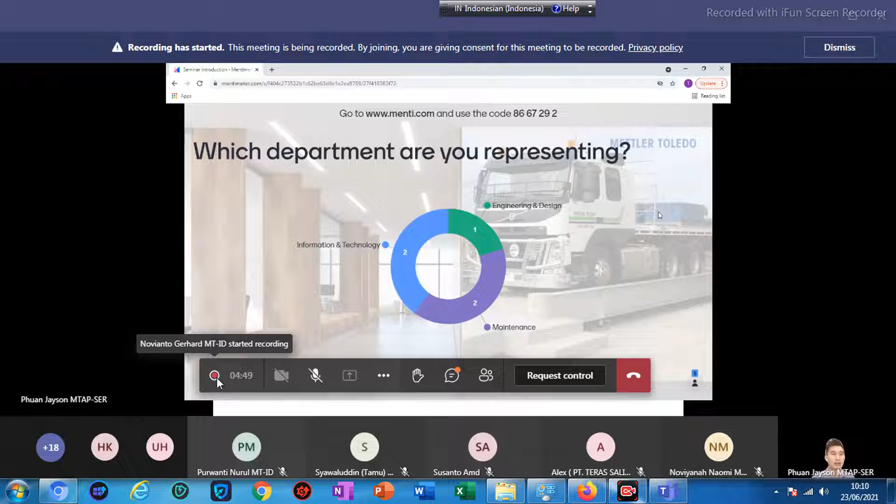And then if we look at the next question here, what are you interested to learn today? We got load cells. It seems like most of you want to know about load cells. 1 person said that they want to know more about calibration and services, and 2 people say, I don't know why I'm here. So if you don't know why you're here today, hopefully I can help to educate you on some of the trends, and hopefully that will give you an eye-opener on today's topic. Okay.

And lastly here, which of the below have you experienced in your plant? Some of you mentioned that there is fraud at the weighbridge. Some say slow maintenance service response is bad as well. Not weighing accurately. It seems like there are some load cell breakdowns that have been observed as well. Tank weighing applications: although this is a vehicle one, I would also like to see if there's any other scope outside of vehicles that may be a concern. So you can see here there's tank weighing. And some of you mentioned that you've not observed any issues so far.

So great, keep this coming. If you have not filled it up, please do so. Just go to the website, menti.com, and type in the code. It'll be great for me to understand where I should focus. So since I know now that what you want to know more about is fraud, service, load cell breakdowns and accuracy, those are the topics that I'm going to hit today. So thanks everyone for participating. Now I'm going to go into our topic here.

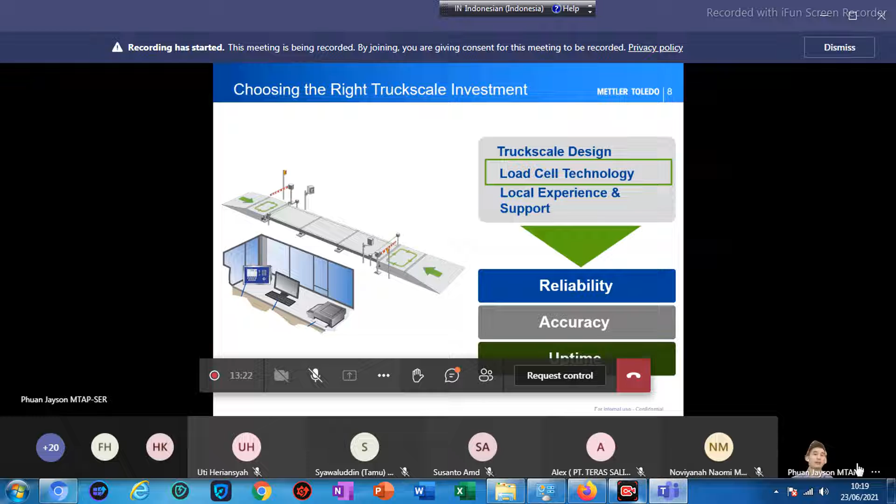So if you purchase a load cell, how much are you expecting to spend in terms of maintaining that load cell for the next 10 to 20 years, right? And last but not least, it comes down to your system performance, where if you have a load cell, you need to know how reliable is it and how much can you trust that the load cell will weigh accurately most of the time, right?

So when you look for a solution, don't always look for something that's cheap upfront and say that, oh, that's a good price for me to purchase, I'll buy that. But then realize that over the next 10 or 20 years, you are spending more on maintenance than the initial price, right? So what I always tell the participants is look for something that may be a bit more expensive, but if you see that the cost of maintaining it is cheaper, then go with it, right?

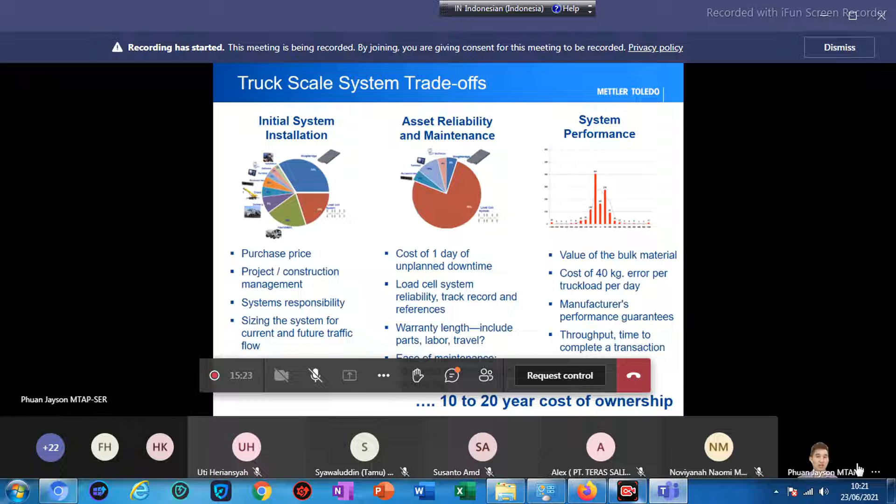Okay, so when you look at purchasing a weighbridge solution, right? We're talking about everything now, right? You can see that 34% of your budget goes to the weighbridge itself. 20% goes to the foundation works. 20% of that budget will be spent on the load cell, and the balance of it is really around installation, software, logistics, and all of that, right?

So what you will realize is over the scale lifetime, and these are actual data that we have collected, you can see that out of the 20% of the budgeting for the load cell system, 78% of the time, the issue would come from the load cell itself, right? And some of these issues are really around load cell failures, right? Where, we saw earlier, some of you commented that, hey, I have a frequent load cell breakdown, right? So when you exchange that or when you replace that, it comes with a cost.

Cables as well, right? Sometimes rodents or rats can bite the cable, or somebody can accidentally cut it, whatever the reason may be. Those are also one of the common reasons that contribute to that 78% of cost. And last but not least, your junction box, right? Junction box, if you put it under the scale, if it rains, water gets in, it would fail very easily, right? So that's what makes up the 78%. That's why I say, if possible, don't try to save up on the 20% to find out that you are spending 78% of your maintenance budget just to fix these issues.

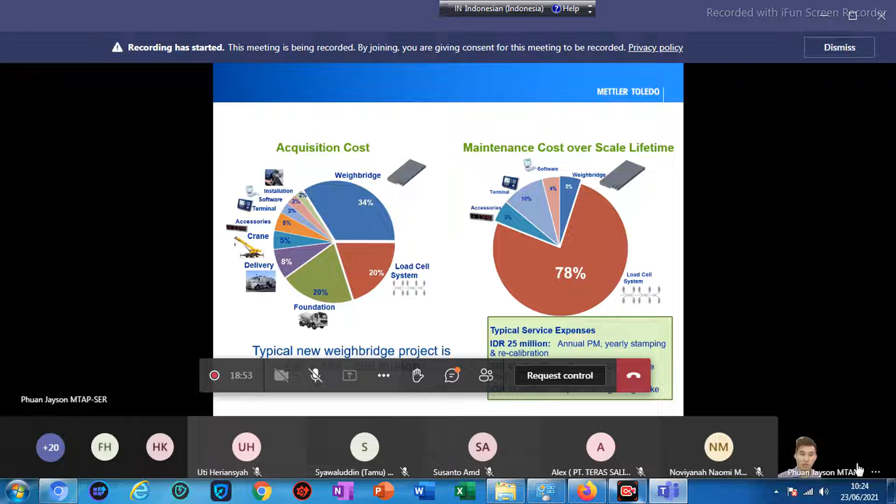You're not spending money only on maintenance, but you are also losing money because your plant is not operational to its maximum efficiency at the same time. Okay, so that's how we get up to the 78%, and that's where we see a lot of the costs go when it comes to maintenance. Okay.

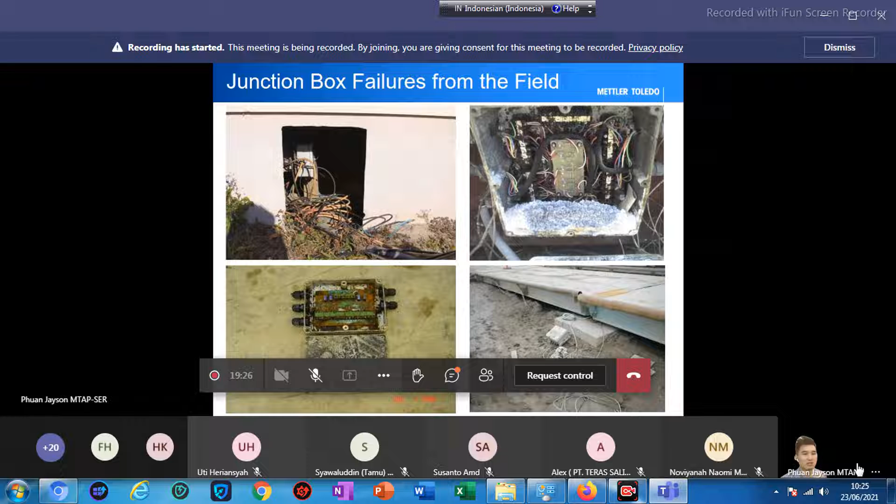So now here are some pictures that I would like to show you of some of the junction box failures that we see in the field. You can see it's very dirty, right? If you look at the picture over here, you can see that the junction box is very muddy, very humid. A lot of water goes in. If you look up here, this is in the US where a lot of snow builds up. And if you see here, there's a lot of cables being left around. And it's not in a good environment, right?

Now, in some cases, if you look at the picture up on your left here, you can see that there's a lot of buildup around the load cell. And what happens is it reduces the movement of the load cell, right? So it's very tight, and that could affect the accuracy as well.

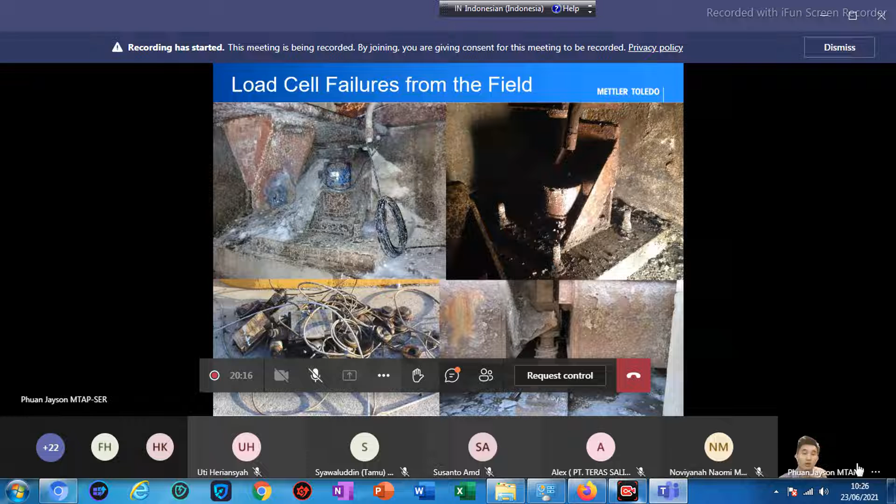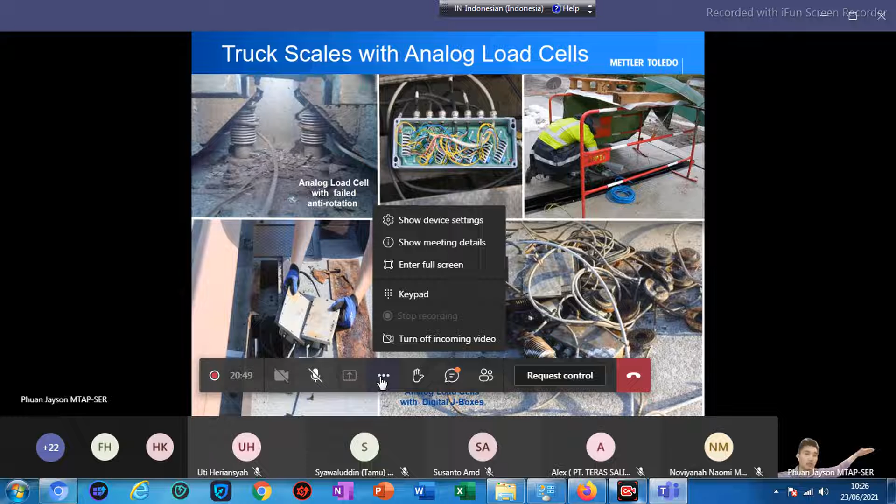Do the calibration with a screwdriver in that box. And it's very tedious, right? It's very difficult to calibrate with that. Okay? So these are the cases for solutions that come with a junction box.

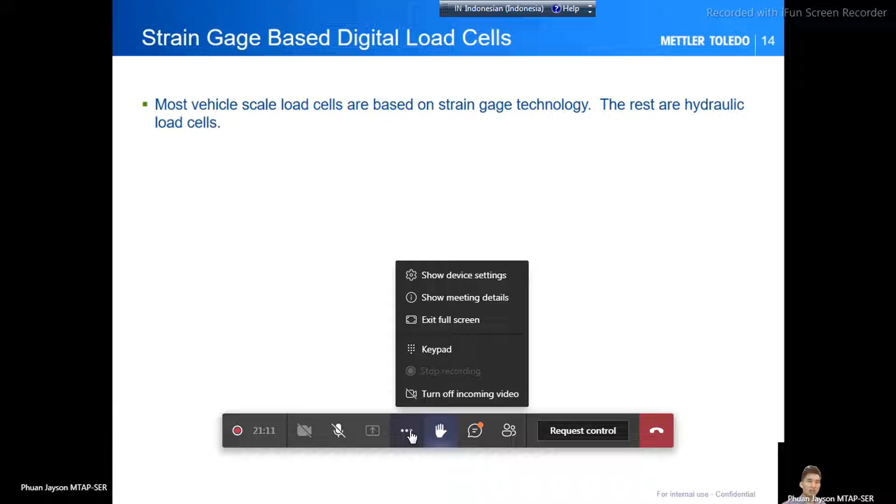Okay? Now, I would like to give you a foundation on how a load cell is made and how it works, right? Because this will be very important for you to understand later on why a load cell is built in a certain way and how it can help you reduce all of the issues that I just mentioned. Okay, so all of the load cells, regardless if it's METTLER TOLEDO or another brand, it doesn't matter. What they're using is basically strain gauge technology.

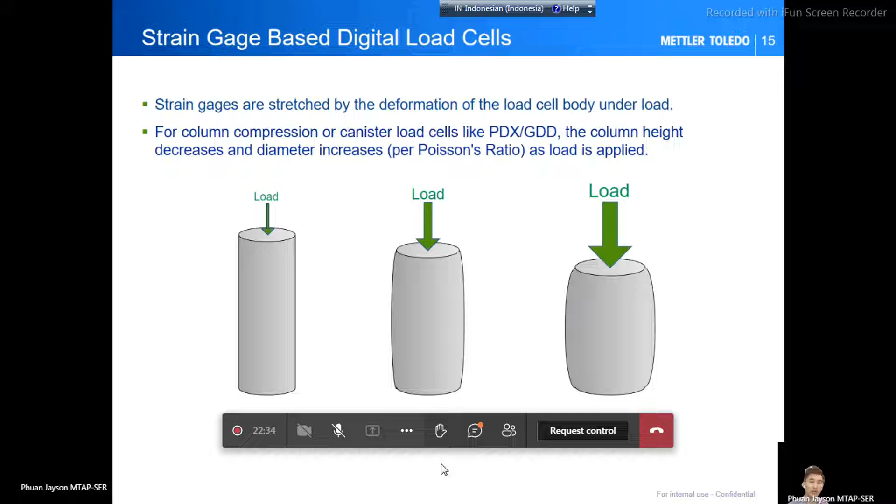It will be shorter, and as a result of that, as you saw in the picture earlier, that longitudinal thing will become shorter as well, and that will send a resistance signal through voltage to the terminal to say that there's a weight coming on, it's getting heavier, and based on that, they will translate it to a weight signal, right? So you can see that once weight comes on, it'll become shorter and it'll become fatter, right?

So that's where, as a truck comes on, you would have this that basically tracks how short it is. And this will basically expand, right? Because as a truck comes on, I press it and it becomes wider. This would expand. And based on how much it expands, it will send a resistance to the load cell and translate that to voltage to give you a final reading. Okay?

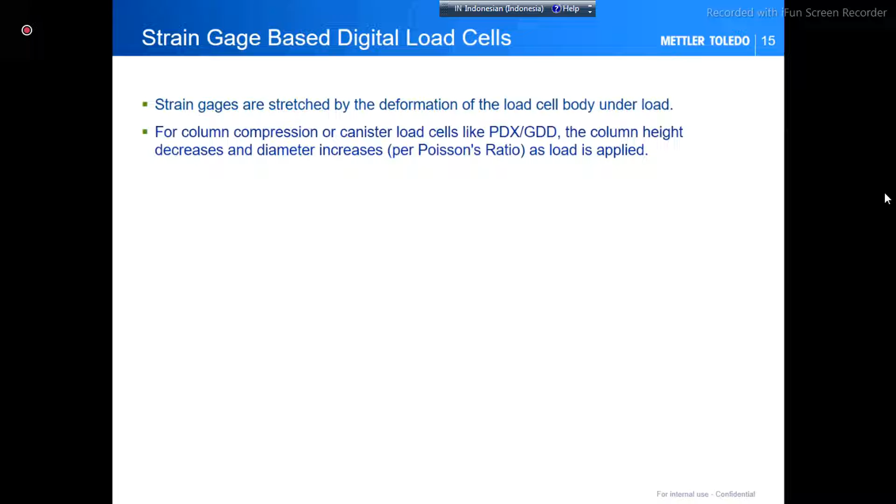Now, why is this technical part important? This is where it matters, right? Because in most cases, when people say, hey, I have a digital solution, it really means translating the analog signal, which is what you saw, the resistance, the voltage, to a digital signal. They are not doing much with it. They're just converting it from an analog to a digital signal, okay?

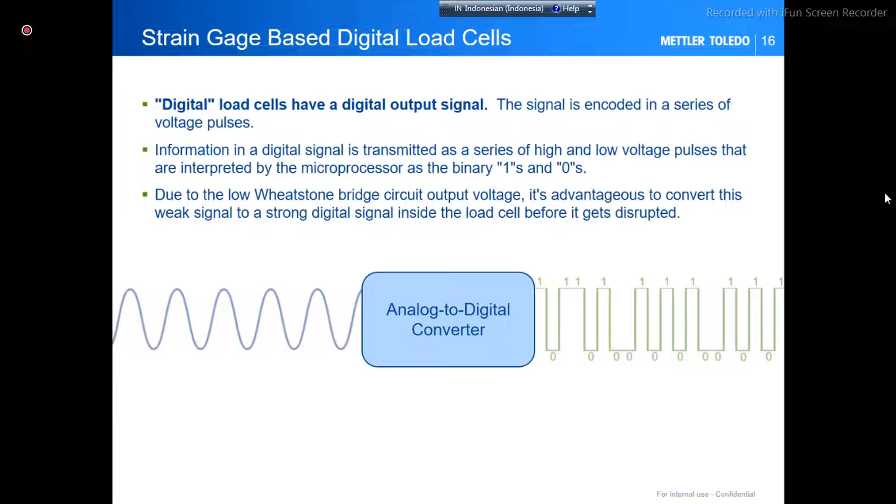And a lot of times in the market, they call it a digital load cell, which is what we are seeing more and more in the market. So remember, what they're doing here is just converting the voltage that's coming out based on resistance into a digital signal. Now in truth, even if you convert that signal to a digital signal, over time you will have a degradation in accuracy. So when you calibrate on the first day, you will be

Hello. All right. Jayson, we are losing you a little bit. Your voice is going down. So this degradation. Yeah. Can you hear me? Yeah, everything is okay now.

Okay. Cool. So the reasons for this accuracy degradation are mechanical, moisture, temperature changes, the components, material buildup, and so on. And this is where maintenance becomes very important. You don't want to leave it too long until you are inaccurate. You want to ensure that it's a straight line, but it's not always possible. So what you then have to do is recalibration.

And then, of course, this will sway away from the ideal line again. But then the question is, when would be the next calibration within the allowable tolerance of inaccuracy? So if you have more trucks, let's say 500 trucks per day, you may have to do servicing 2 to 3 times a year, or maybe 4 times, once every quarter. But if you have 100 trucks per day, you may only need servicing once a year, because you're not weighing that much, so your accuracy wouldn't sway too far too quickly. Okay.

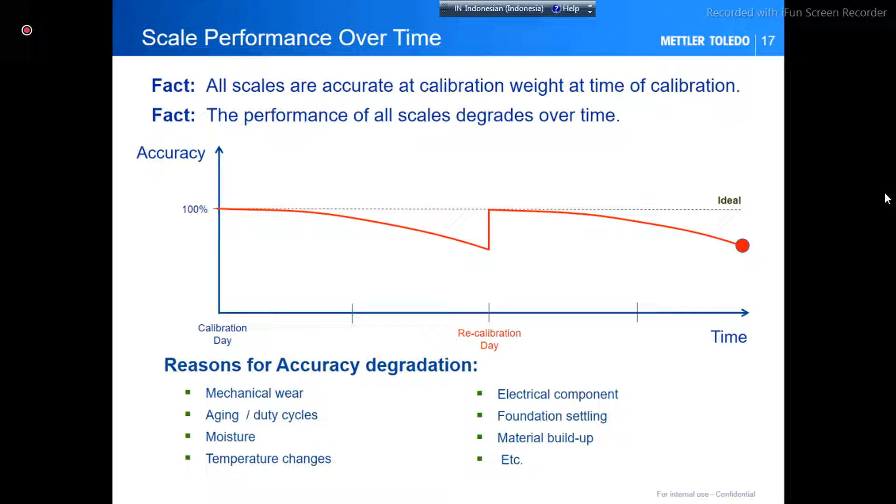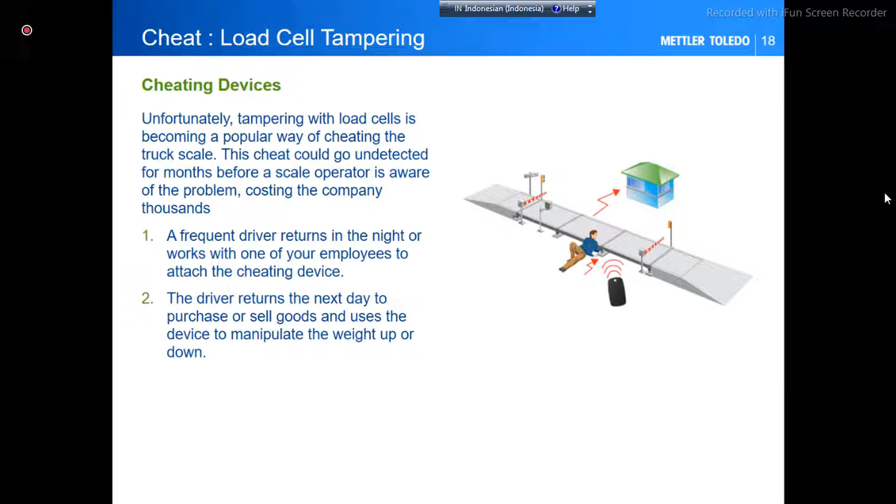Another thing I would like to highlight is fraud. Like some of you mentioned earlier, fraud prevention is a concern. And what you see here is load cell tampering. That is also a big concern. Even if you convert the signal from analog to digital, tampering can still happen. These are some pictures we got from the field of a device where you install this resistance into the load cell.

Basically, if I'm the truck driver, I come on the scale, I just click a button and it simulates a higher weight, or I click a button and it simulates a lower weight, depending on what I want. Now the driver has control. If he's trying to sell something to you, I can press the button and my weight goes up by 500 kg. Now I'm tricking you into giving me more money because it seems like I'm giving you 500 kg more, but that's not the case.

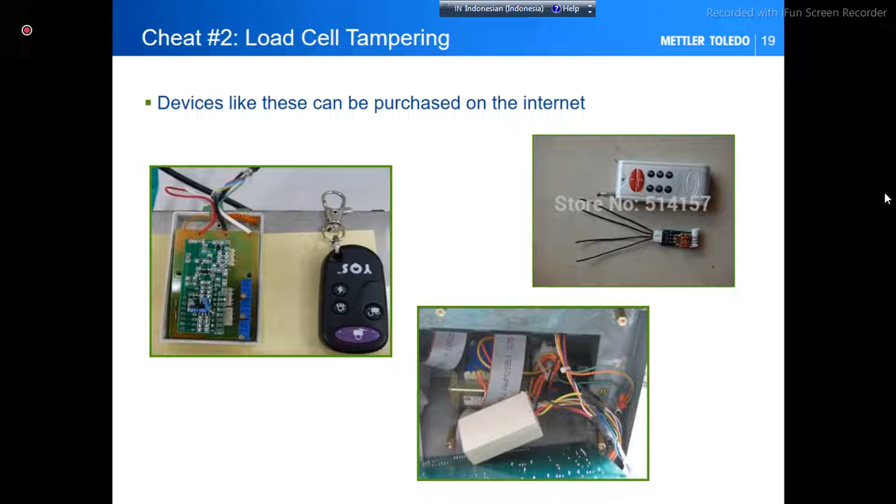We have seen this a lot in the market. These are some actual pictures where people have cut the load cell, installed the cheating device, and used the remote as a tool. Or they can install it at the terminal and do the same trick. These are all very common, and not only can they cut from the side, sometimes they cut on the top as well. Why? Because if the weighbridge is sitting on the load cell, you will not be able to see the cut from the side. So people think my load cell is doing fine, but in actual fact the cut happened on top. Okay.

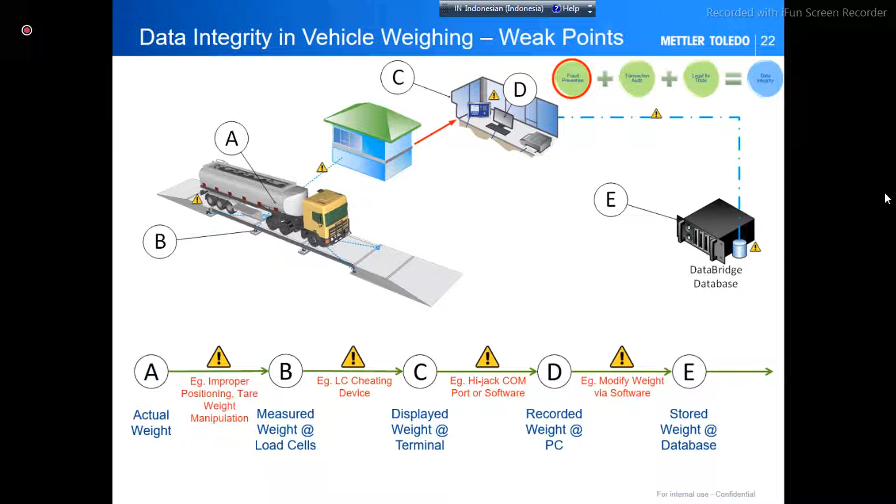And then we talk about load cell cheating device as well. So that is something that you could switch with a remote from the measured weight to the terminal, and it could give you a different reading. Or you can also hijack a COM port or software with the device as well. And last but not least, you can modify the information in the back end through the software as well.

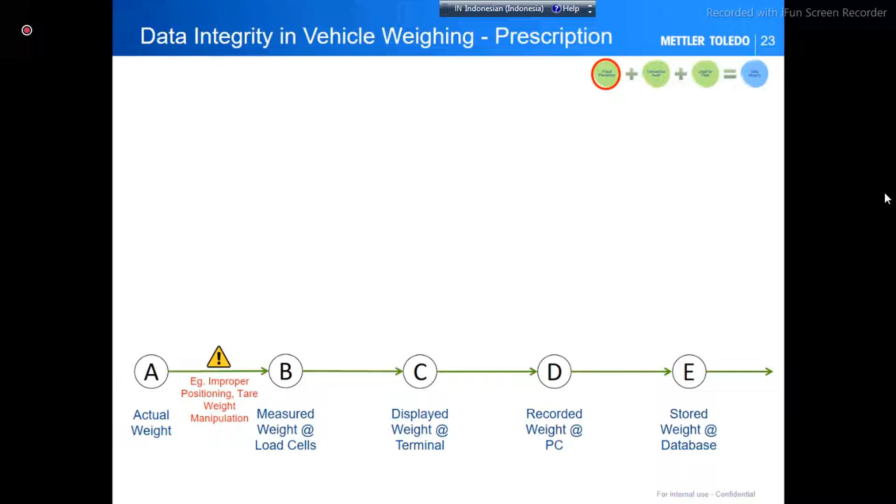Okay, so when it comes to improper positioning and tare manipulation, we have software to reduce that. When it comes to load cell cheating device, we have our load cell, which I will talk more about in a little while here, where we have a CAN bus communication, which is much more encrypted. We also have breach detection to detect if somebody has broken the load cell to install something.

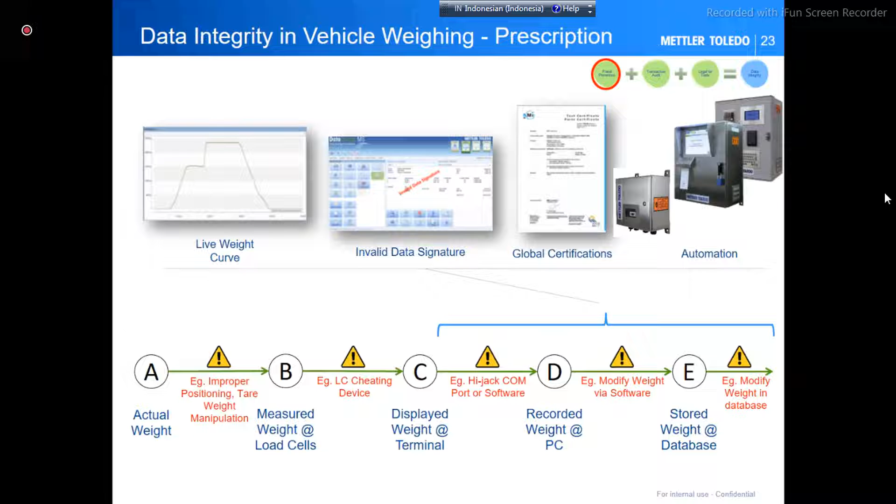And last but not least, really around software, we have global certifications, we have automation, which I will not talk about today, all right? So back to our load cell topic, there is a big difference between in tolerance but not on target and in tolerance and on target, okay? Now, at the end of the day, if you are deciding to purchase a load cell solution, if you compare the spec sheet side by side, it doesn't give you a full picture of what problem you are able to solve, right? Let me give you an example.

Now, if you purchase a load cell and you say that, hey, Jason, I like this load cell, it's cheap, it may not be accurate all the time, but it's fine. I don't really mind that. I just want a cheap load cell because, like you mentioned, right? I just need to be in tolerance. And yeah, I can do maintenance more often. That's fine, right? Because I want to reduce my budget.

Now, the problem with that is when you are only looking for a solution that is in tolerance, that means maybe plus minus 50 or plus minus 30 kg off, it's not good enough, because I'm going to show you a calculation in a while to see if you're losing 30 kg per weighing every time or 50 kg per weighing every time, how much money you are losing at the end of the day over 1 week, over 1 month, over 1 year, right?

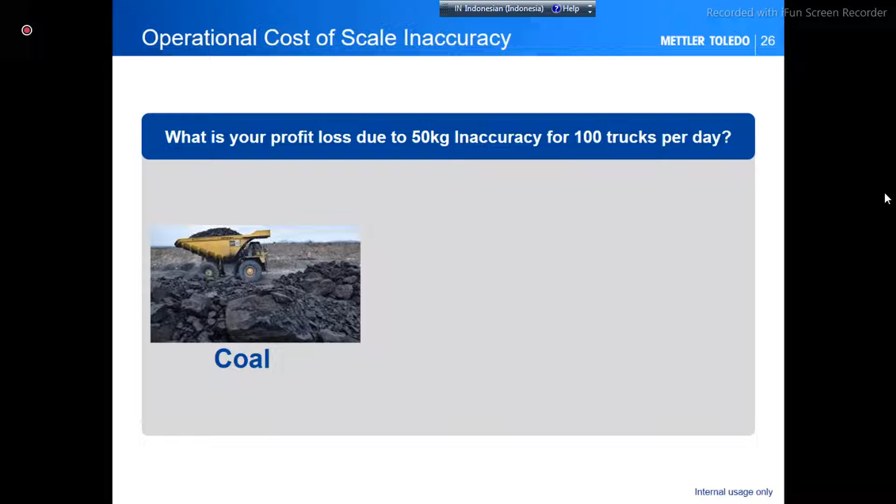So what we are talking about, as I mentioned earlier, 1 year loss is around 1.9 billion Indonesian rupiah. My next question would then be, what if you have 2 truck scales, right? You got to times this number by 2, because in my initial example here, we are only considering 1 truck scale, right? Or what if instead of 100 trucks per day, you have 200 trucks per day? You got to times the 1.92 billion by 2 as well, which would be up to 4 billion, right? Or what if you have 100 kgs of inaccuracy, right? You got to double that up again, where instead of losing 2 billion Indonesian rupiah, you're now losing 4, right?

So you can see that even in the short term, you might say that, yeah, it's only 50 kg, my stuff is not that valuable, I'm fine. But if you look at the long term, it really costs you a lot of money. And if you look at how much it takes to spend on buying a new weighbridge that I showed earlier, it's around 600 million, right? In a year, you can actually buy 2 weighbridges or even more than that with the amount of profit that you have lost because of this, right? So investing in the right solution is very important, and a solution that is accurate is very important as well.

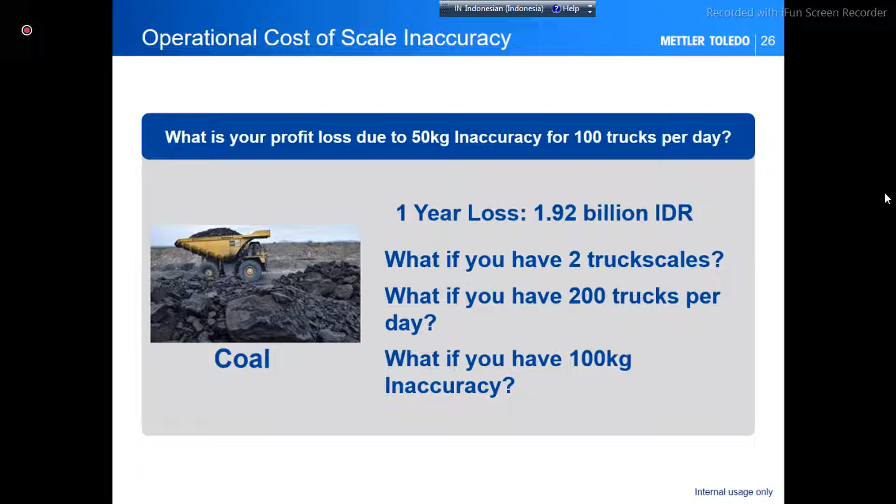Okay, so with that, I will go into our PowerCell load cell here. Now, what we have done with this is really remove the junction box, right? As we talked about earlier, we are removing the part that has given us the most problem, and instead of connecting to a junction box, we are connecting from load cell to load cell. Now, this PowerCell load cell communicates in a CAN bus network, a language that only our METTLER solution can speak. So if someone is trying to decrypt the language here and tamper with the weight, they cannot do that because only our terminal can understand the communication protocol that is coming from our load cell.

Now, the lifespan of our load cells as well is almost 3 times that of an analog load cell. It has lightning protection. It can withstand floods and temperatures. And we also have active compensation for some of the external environmental factors that may come into play here, which I will share with you in a while.

So the PowerCell PDX here, as you can see, is a stainless steel enclosure, so it helps against certain acidic environments. We have laser welded it as well. It is hermetically sealed. It's filled with helium gas, and the reason why we fill it with helium gas is because of the last point there. We actually have a breach detection sensor in the load cell, where if somebody were to break open the load cell, the helium gas concentration will drop, and this sensor will send a notification to the terminal to say, hey, load cell number 3 has been tampered with or broken open.

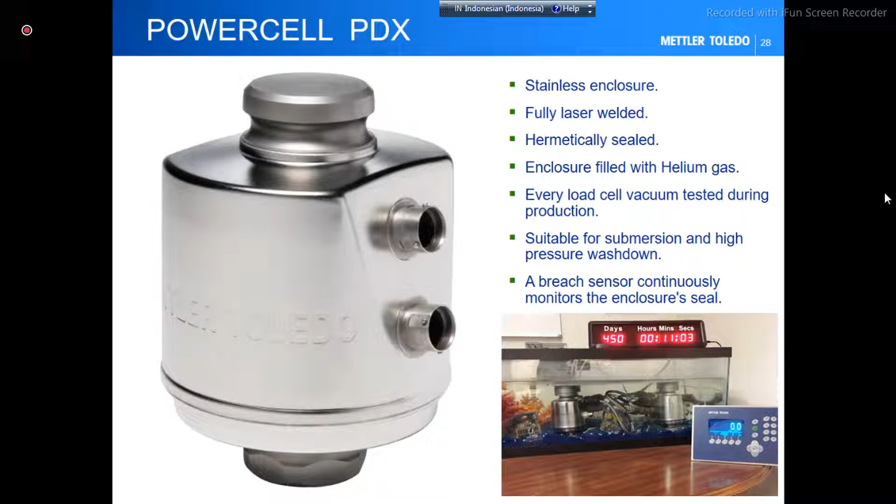We also have an IP rating for our load cells, which is IP68 and IP69K, and I will share with you later on why that is important. So if you look at the picture here, this is a test that we have done where we put the load cell into an aquarium for 450 days. And at the end, you can see that it's still working, right? We did not take it out. We did not touch it. Just to show the IP rating, we put it underwater for 450 days, and yet it's still working after that.

Okay? So now, what differentiates us from a digital load cell, right? Remember, I talked to you earlier about the strain gauge and converting the analog signal to a digital signal.

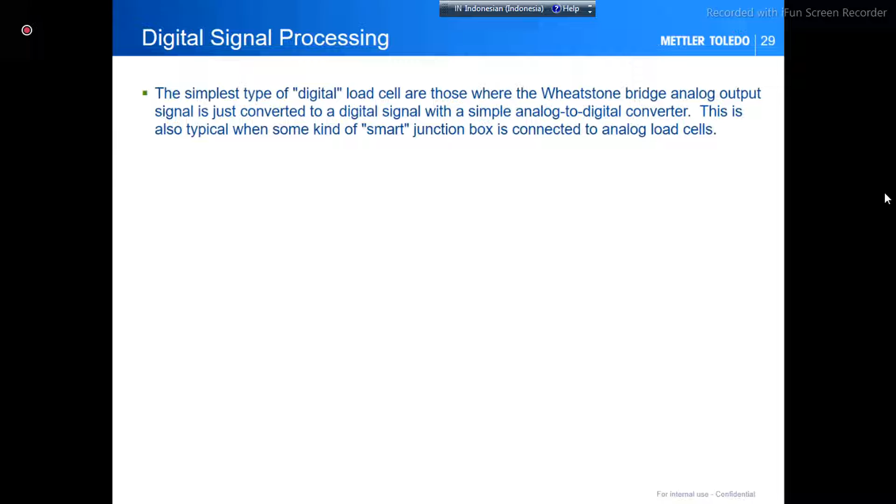We are doing more than that. What we are doing is we are not only converting the signal, but we are also doing some sort of compensation to make sure that your weighment is as accurate as possible, right? So our power cell load cell does this. We convert the signal to a digital signal that you can see here. At the end of the day, we are digitizing this signal.

But what we are doing more than that is based on certain factors like temperature, like loading, and all of that. We are basically trying to squeeze that tolerance to be as accurate as possible and to compensate for all those errors, right? So that's what we are doing.

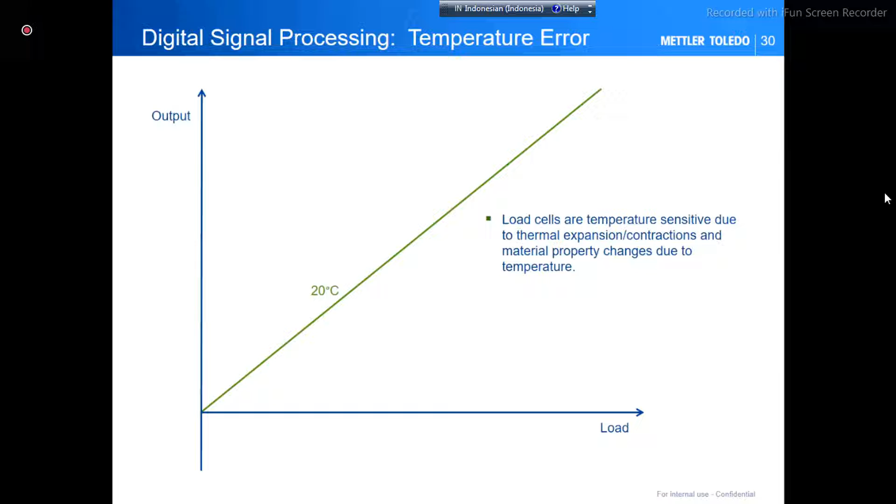So let me give you an example. When it comes to a temperature error, ideally, we have a straight line like this, right? As the load goes up, we want to have a linear line. In certain cases, where temperature could be hotter, you can see that we are still compensating for that at 40 degrees. Or if it's at minus 10 degrees, we are compensating for that as long as we are getting a linear line. That would help to compensate for the errors, right?

Okay, so we have a sensor inside the load cell to basically measure the environment. If it's too hot, we will adjust the signal to be as accurate as possible. And all this is done through the microprocessor that we have, where in our factory, we will put the load cell in the cold chamber, and then we'll also put it in a heating chamber to basically adjust the referencing of each of the load cells.

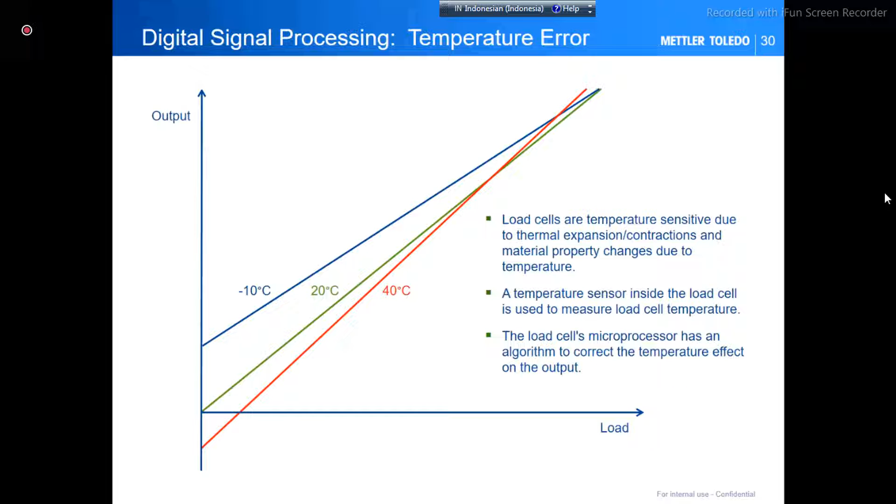Okay, so now you can see that before the digital signal processing, it's very erratic, right? You have different lines everywhere. But what we do is after the digital signal processing, we try to make it as linear as possible to zero, regardless of the different temperatures.

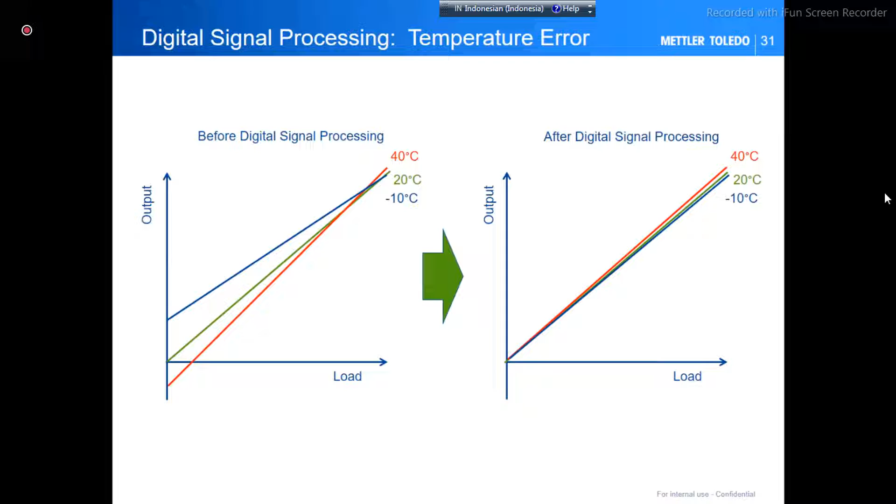That's why we have installations in Russia, in Japan, in Indonesia, in Saudi Arabia, and the load cell failures that we have returned to the factory is almost close to zero, right? The load cell failure is 0.03% when it comes to returning it to the factory. Okay, so once again, it's not only a digital load cell, it's a power cell load cell because of that active compensation that we do with temperature.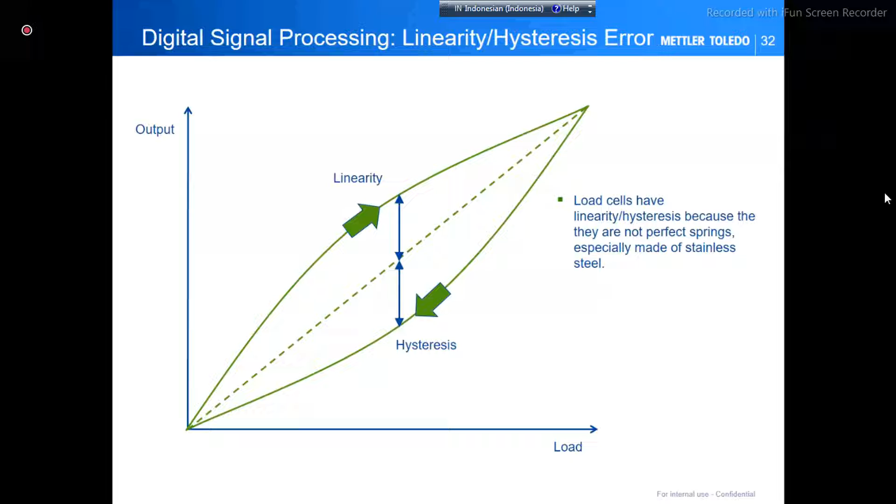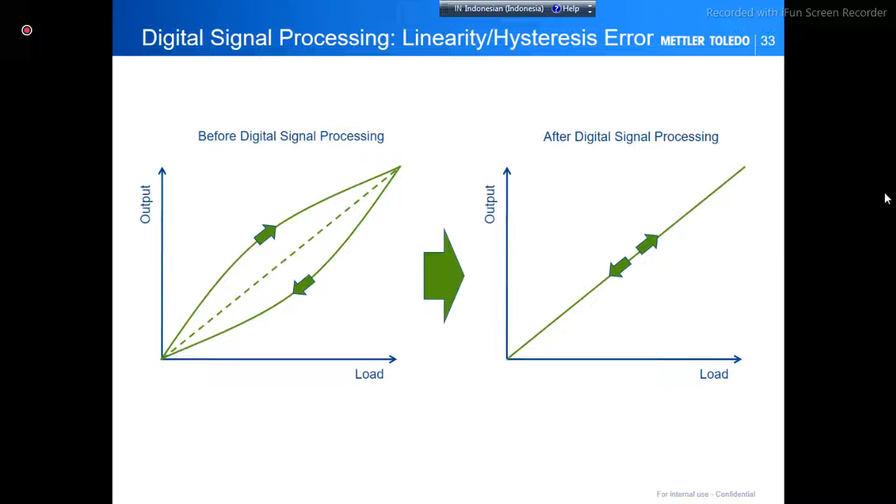Okay, not to go too much into detail here, linearity and hysteresis error is really around truck loading onto the scale, right? So as the truck comes on, it will not be a straight line, it will be a curve. And when the truck goes off, you can see that it will be another curve coming down, right? So what we are doing in the load cell is we are basically squeezing that as close as possible to a linear line as well through our active compensation, so that you are getting the accurate weight as much as possible.

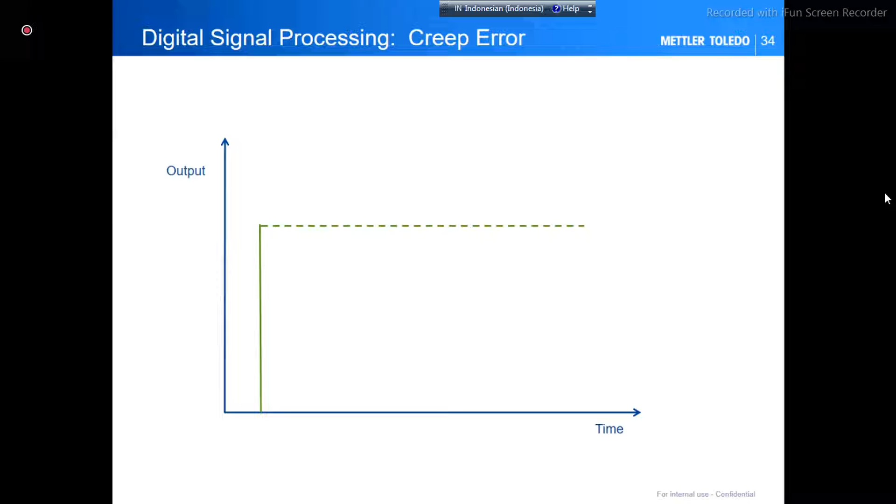And last but not least, we have creep. Now, creep is basically when the truck comes on, you can see that the weight goes up. If he stays on the scale for too long, you can see that the weight will increase, right? Because of different temperatures and because of the time that the truck is on the scale. So you can see that at different temperatures, the weight will increase, and this will cause an inaccurate weighing as well.

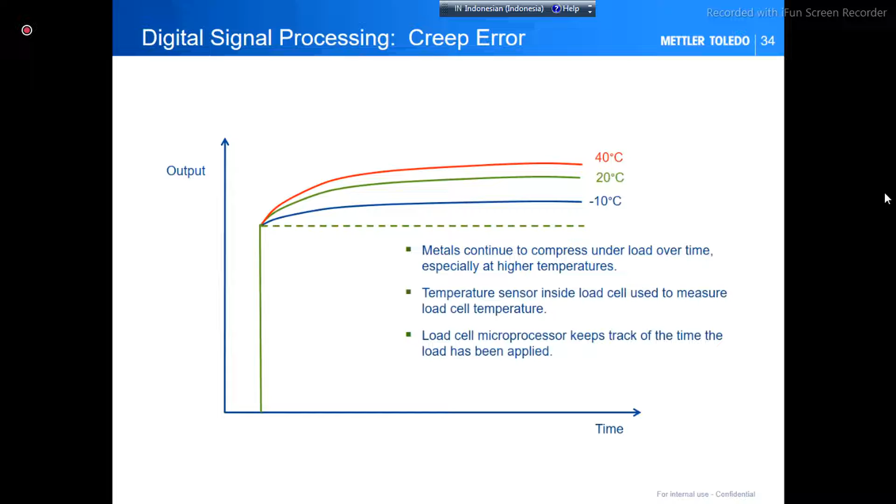So what we are doing is we have the microprocessor to also track for creep, where if we see that the truck has been on the scale for too long, we will compensate that to ensure that if it comes on at 10 tons, it will continue to stay at 10 tons for an X amount of time, right? Maybe for like 10 minutes or 5 minutes. We will hold that value of 10 tons over a certain period of time. And we compensate for the weight regardless of different temperatures as well. Okay?

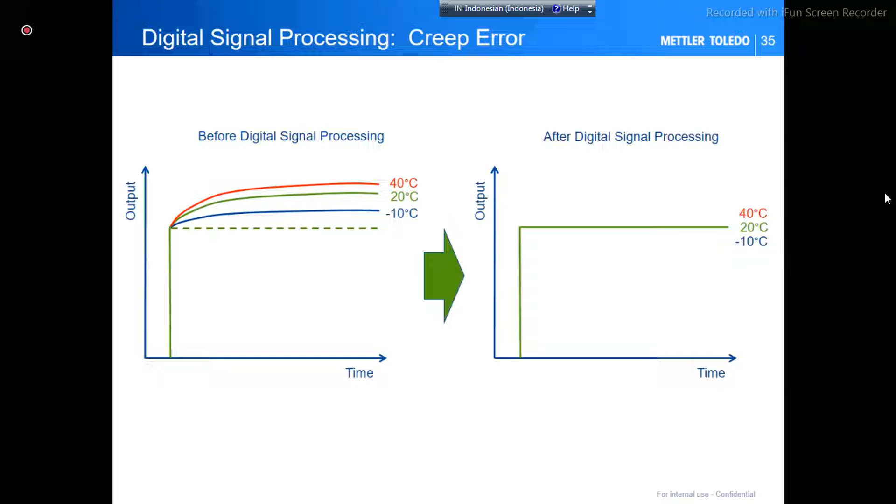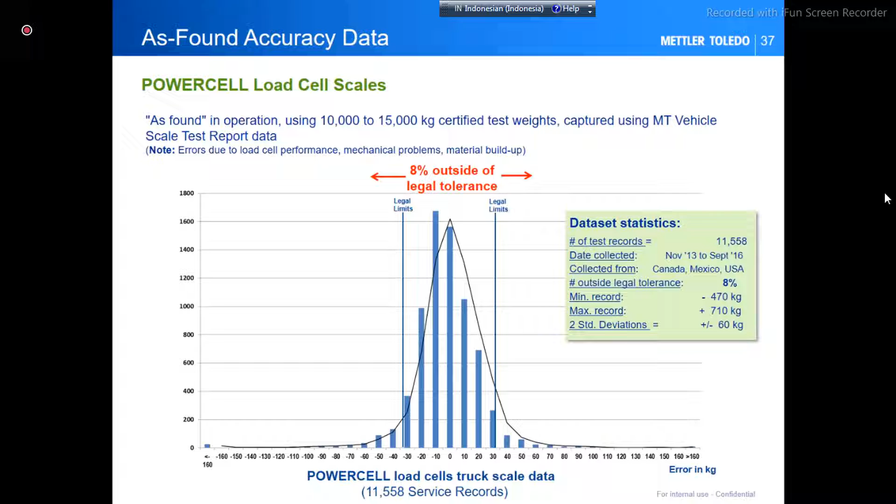Now, we are not saying that we are accurate all the time. But what we're saying is that we want to try and reduce these as much as possible so that you are not losing money like what I shared with you earlier, right? So the results that I'm showing you are not only from METTLER TOLEDO, but if you look down here on your right, these are also results from Fairbanks, Rice Lake, Avery, Cardinal, and Revuelta.

So what I'm trying to compare here is not so much the brand, right? Because we also do have analog load cells. And as you can see, the technology of analog load cells gives you a plus minus 163 as compared to the technology of the POWERCELL that gives you a plus minus 60 kg, right? So it's really around the technology, not around the brand. And that's what we do. We do digital compensation with our POWERCELL load cell.

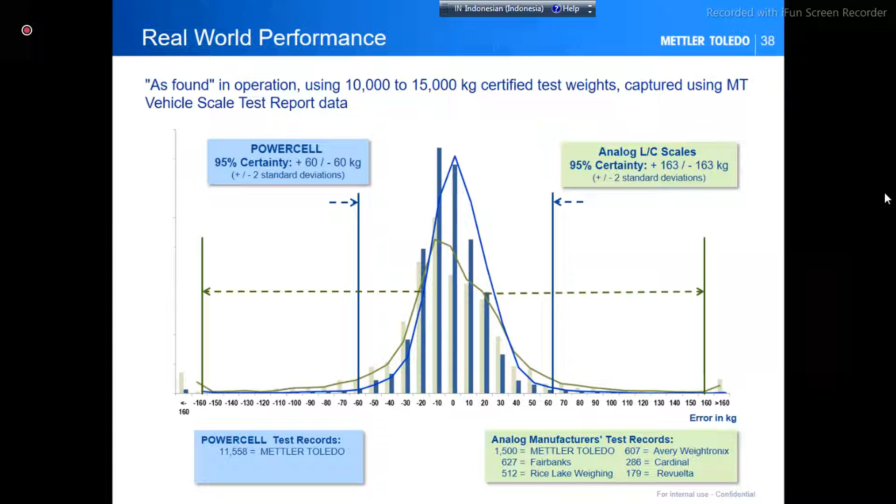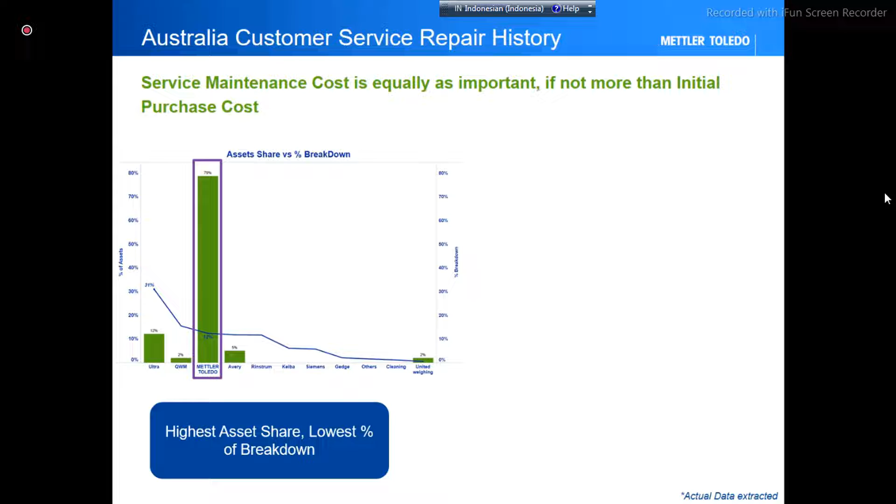but if you look at the breakdown, it's very low, right? This is basically a view of how much the customer has spent in the event of an unplanned breakdown. So for example, if I'm doing operations as usual and suddenly it breaks down, how often does that happen? So you can see here, I will give you a very common name.

We have Avery. You can see that Avery is only 5% of the installation, but they contribute quite a bit when it comes to the breakdown cost, right? And if you look at METTLER TOLEDO, we have 79% of the weighbridges installed, but our maintenance cost is very low. It's one of the lowest, right?

So again, as I mentioned earlier, you shouldn't only look at the initial purchase cost. It may be cheap, but the maintenance cost may be higher, right? And that's where we have this data to prove that regardless of having so many installations of our POWERCELL load cell at this customer site, we are still keeping the maintenance costs low over the next years. Okay, so this is very important.

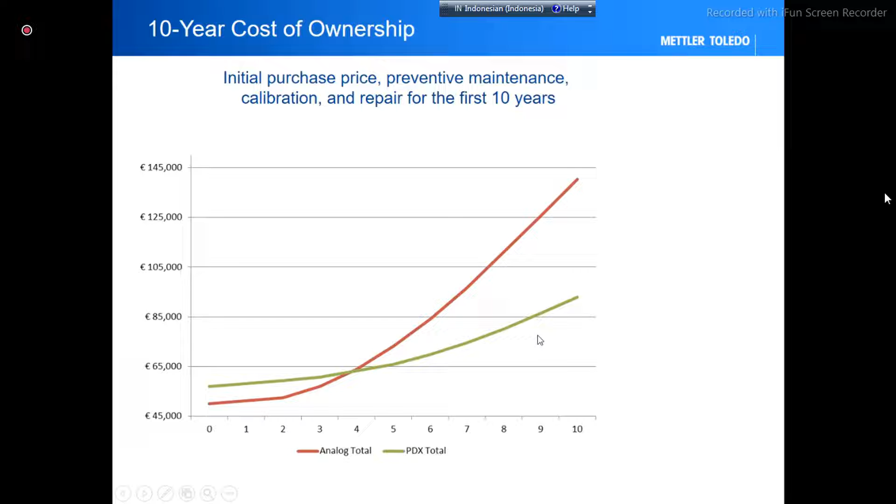At the end of the day, one thing you have to understand is, yes, you may purchase a solution that is cheaper, but maintaining it could be more expensive. So why not spend a little bit more in the beginning, so maintenance costs will be much cheaper later on, right? And all this is due to us taking away the junction box, having lightning protection of up to 80,000 amperes, an armored cable, hermetically sealed electronics, and predictive diagnostics. All these play a very important part when deciding on a solution.

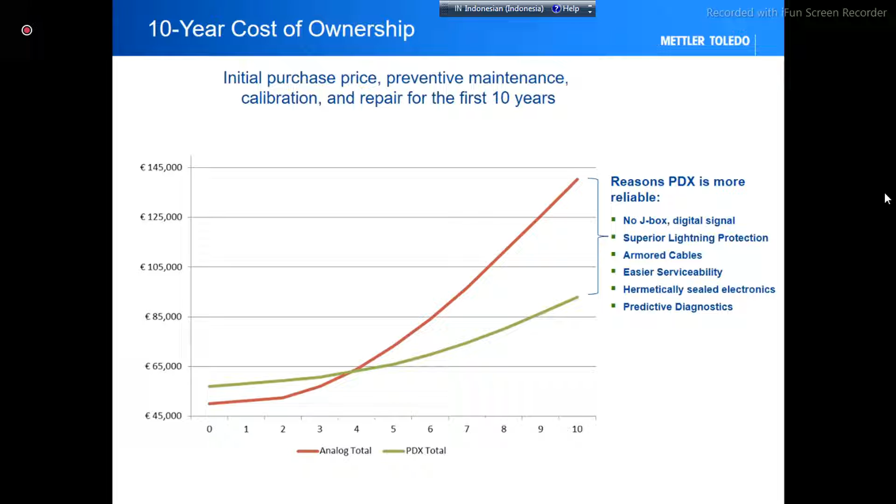All right. So with that, what I'm going to share with you next is how we make our load cells. You will see in the video later that the strain gauge is on the load cell, and we attach a microprocessor to it to digitize the signal and also compensate for all these external factors. Okay, so I'm going to stop sharing my screen for a while. I'll come back and share with you the video of what I'm talking about in just a moment.

Okay, I'm gonna include my computer sound.

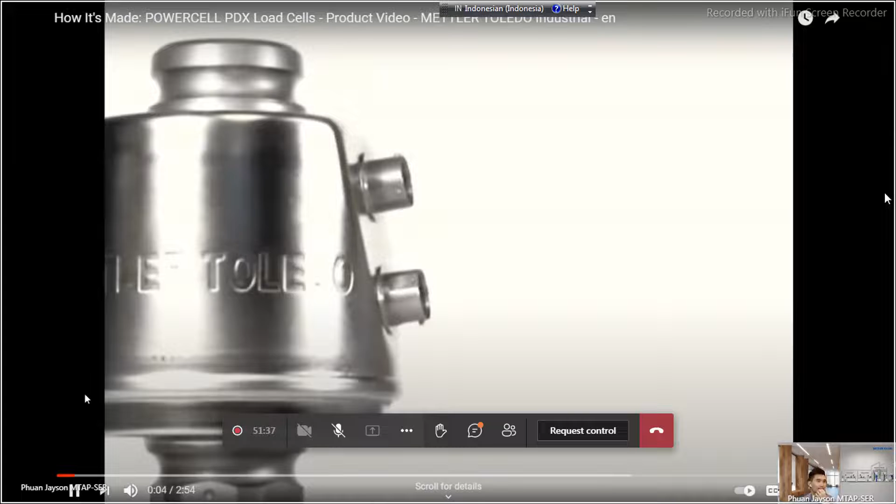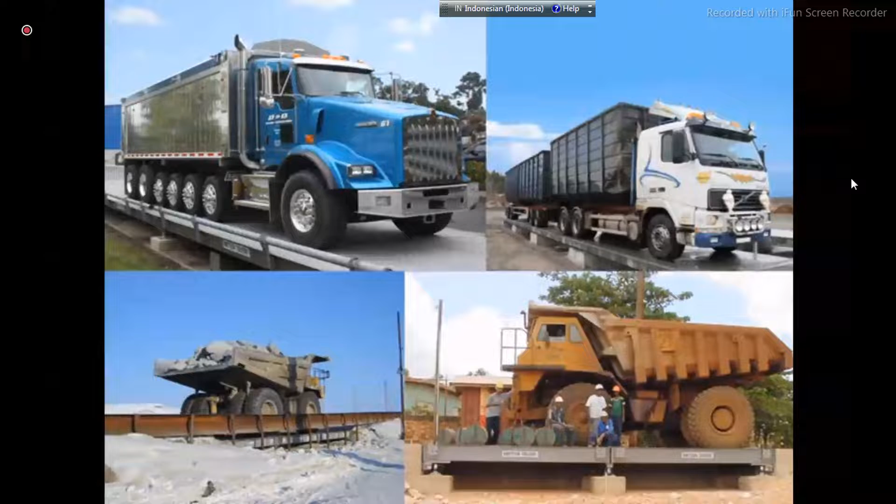Since 1988, PowerCell load cells from METTLER Toledo have led the industry in digital heavy capacity weighing. PowerCell PDX load cells are the third generation of PowerCell technology. PowerCell PDX was developed by METTLER Toledo's heavy capacity divisions in Switzerland, China, and the United States for use in applications all over the globe. These load cells are manufactured in a specialized production facility, which has produced over 7 million load cells since 1989.

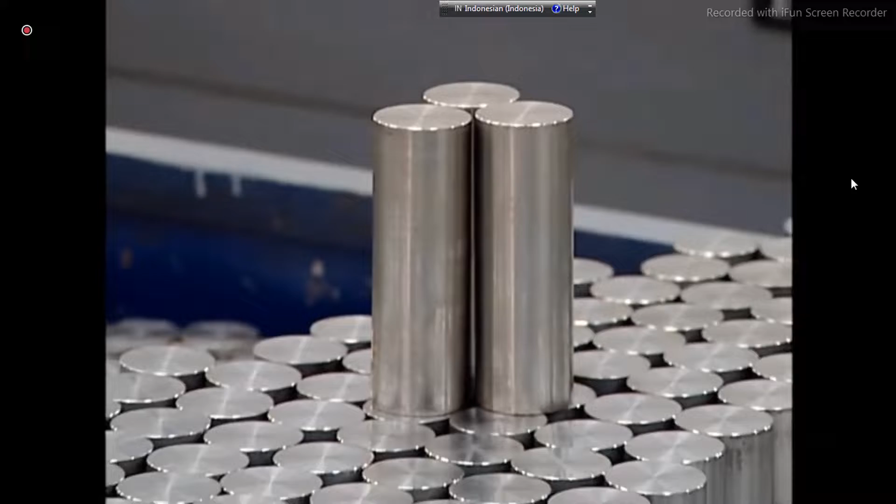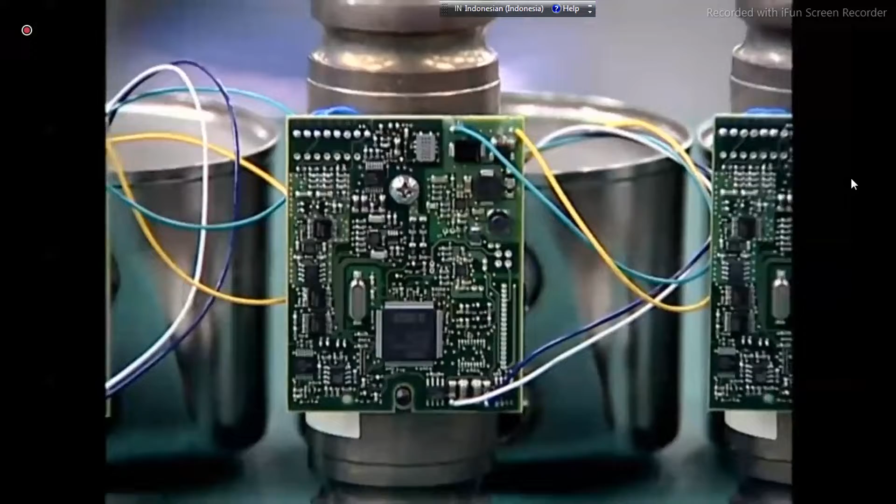Production of PowerCell PDX load cells begins with high-quality stainless steel and an array of computer-controlled manufacturing equipment. The stainless steel core is precision machined and then heat-treated to enhance material strength. Each cell core is serialized for product quality tracking. Strain gauges are affixed to the finished core. They convert the weight applied to the cell into an electrical signal. The strain gauges are individually inspected to ensure accuracy. Advanced electronics are then mounted directly to the core. These electronics provide the secure digital weighing signal for each load cell.

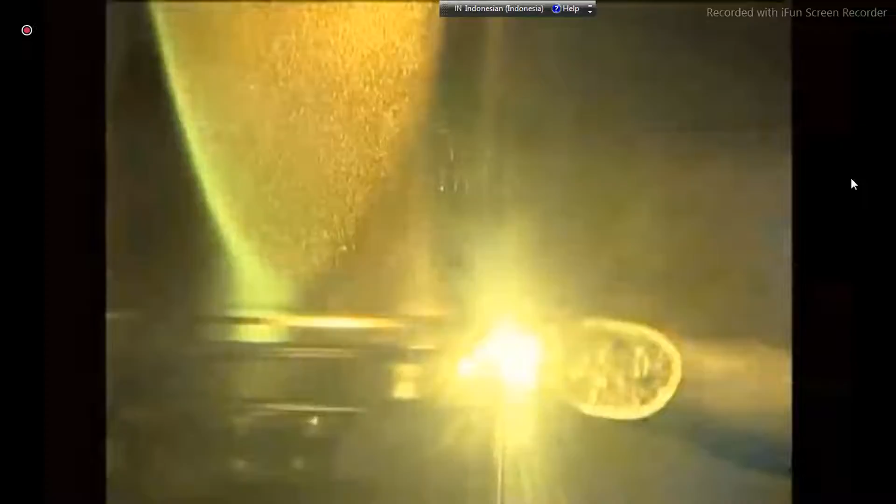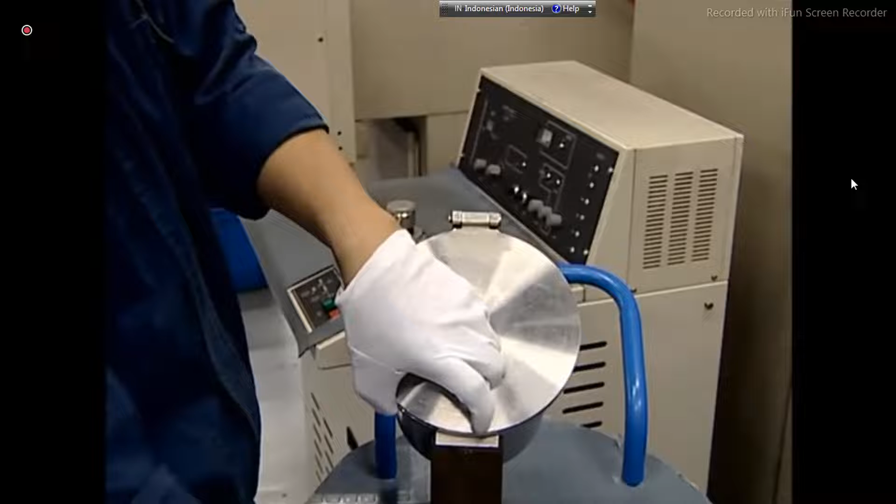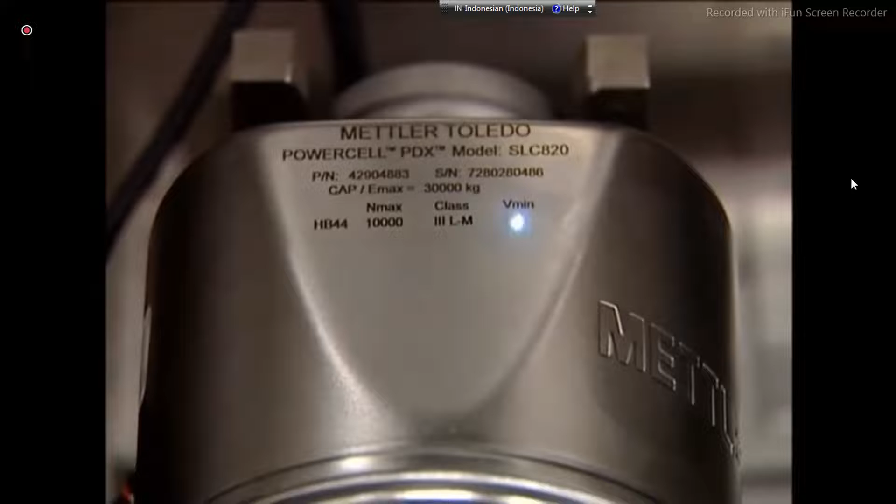Next, the stainless steel enclosure is installed, providing protection in any environment. The enclosure is fully laser welded, producing a strong and completely airtight seal. The hermetic seal of each cell is then tested under vacuum. But building the cell is only the beginning. Each PowerCell PDX load cell is temperature compensated in a controlled chamber. This ensures weighing accuracy, regardless of temperature fluctuations at the scale. Thorough individual testing further ensures accuracy and performance. Only now can the cell be laser engraved, noting its certifications as a top-quality METTLER Toledo load cell.

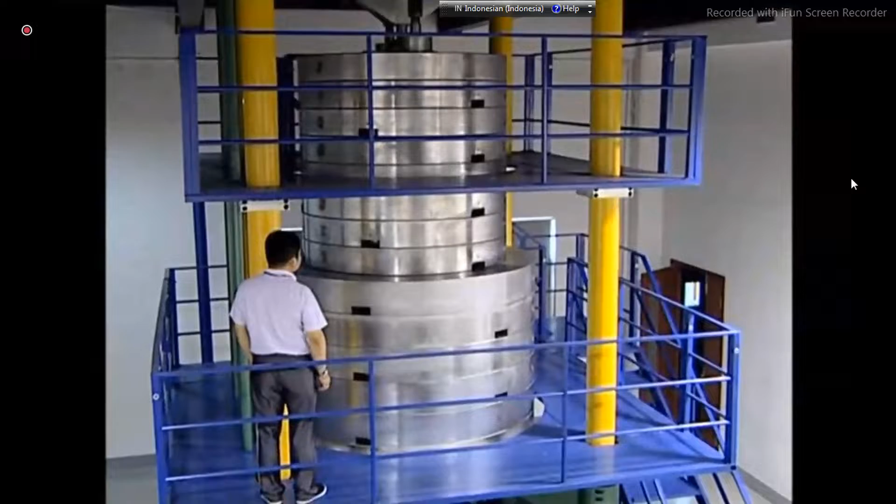This facility also houses specialized R&D equipment, such as a 50,000 kilogram deadweight test machine used for product development and testing. The finished load cells are then ready for reliable service in any environment, from the hottest desert to the Arctic Circle. No matter what you weigh or where you weigh it, PowerCell PDX load cells are built for the challenge, with unsurpassed quality, reliability, and accuracy, only from METTLER Toledo.

All right. So hopefully that gives you an understanding of how we produce our load cells in China. Okay. So next, what I want to share with you here is our lightning protection. And this is very critical, right? In Asia, especially, there are a lot of lightning situations that happen. And what we have done is we have developed the load cell to be protected from lightning up to 80,000 amperes, where a typical strike is around 30,000 amperes.

Now we have not only claimed this, but we have also tested it in a lab, and we also have certificates that we can share with you from the third-party lab to say that, hey, this has been tested and it has been working as expected, right? So what I'm going to share with you now is a video on how this test was carried out in the lab itself. Okay, so.

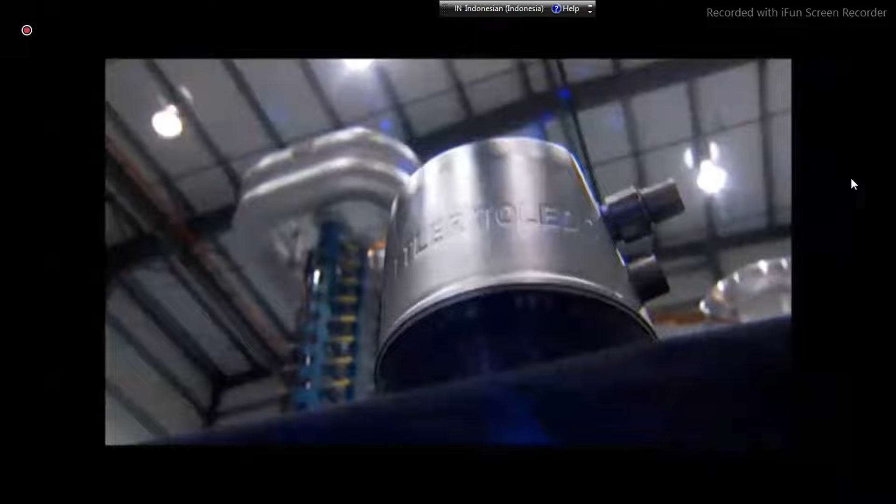There are more than 8 million lightning strikes a day worldwide. All it takes to put a vehicle scale out of service is one. Be protected with METTLER Toledo's Strike Shield technology, built into the PowerCell PDX load cell system. As the market leader in vehicle scale lightning protection, METTLER Toledo knows the high cost of lightning damage and downtime. To prove the reliability of our designs, we underwent independent laboratory testing, subjecting the entire PowerCell PDX system to the real-life effects of lightning.

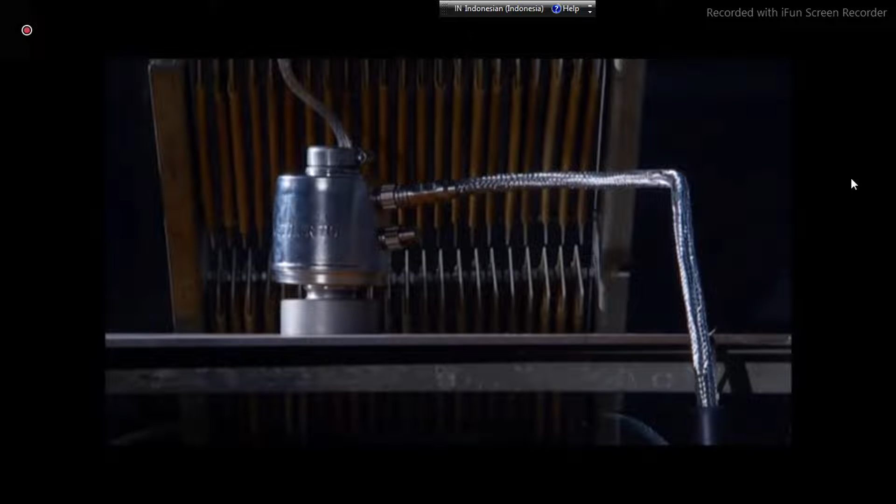The network is designed using a smart grounding system with lightning protection components in the load cell and terminal. The system directs dangerous currents away from the load cell and terminal, which shuts off in the event of a surge overload, protecting the entire system from damage. This protection allows the PowerCell PDX system to withstand lightning strikes up to 80,000 amperes, more than twice the amperage of a typical lightning strike, making the PowerCell PDX the only system with proven performance in and out of the lab.

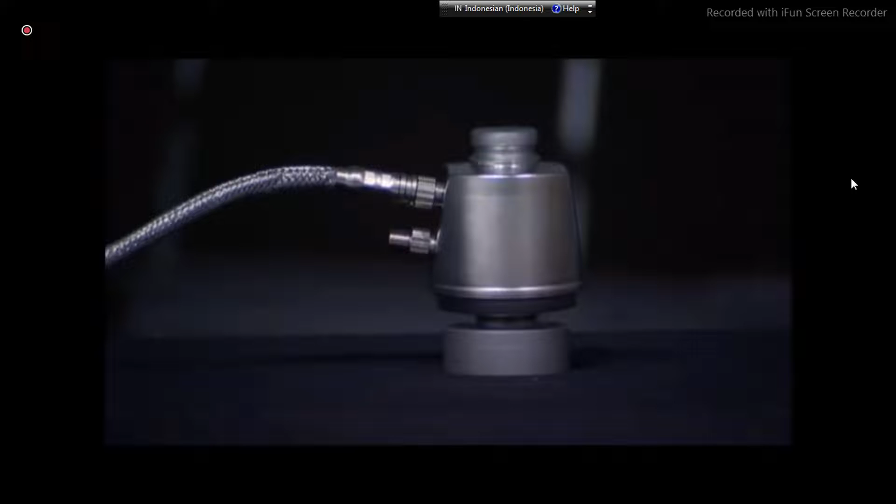In Texas, Lone Star Specialty suffered a severe lightning storm, causing major power outages. Power was off for more than 2 days. Our computer server was a total loss, and we lost our main phone line for over a month. But the scale with the PowerCell PDX system made it through. Lightning damage from the storm cost Lone Star time and money, but their METTLER Toledo truck scale performed as if nothing had happened. Let METTLER Toledo protect you from lightning damage with the PowerCell PDX system's Strike Shield technology.

All right. So that's a video that you can find on YouTube on our lightning test that we have done. And again, we also have the certificates that we could share with you as well. Okay.

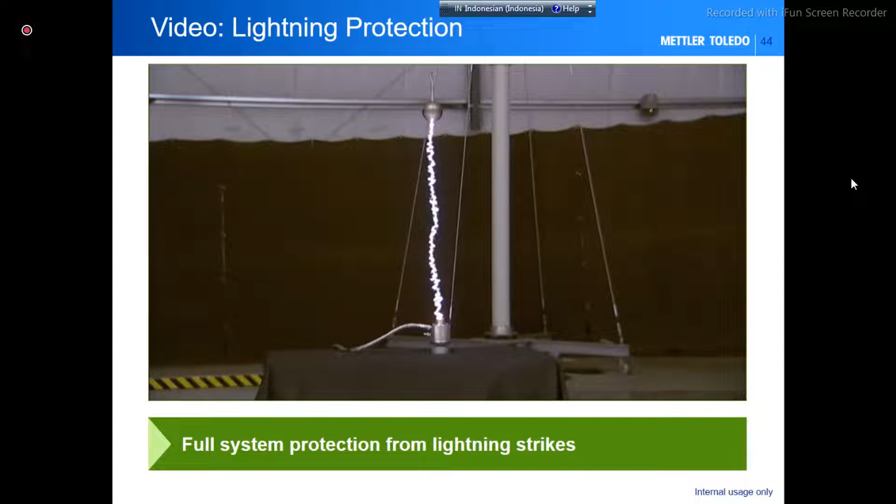Lastly here, if you look at our PowerCell PDX, one thing that I would like to highlight is also protection from corrosion and failure. We actually have a stainless steel component that's built with the enclosure, and we have also passed IP68 and IP69K with breach detection. So you would always know if the load cell has been broken open, right?

And one of the reasons why we put IP69K for our load cell is because of high pressure washdown, right? So IP69K basically says that I can direct a high pressure washdown at the load cell, and yet it still wouldn't damage it at all, right?

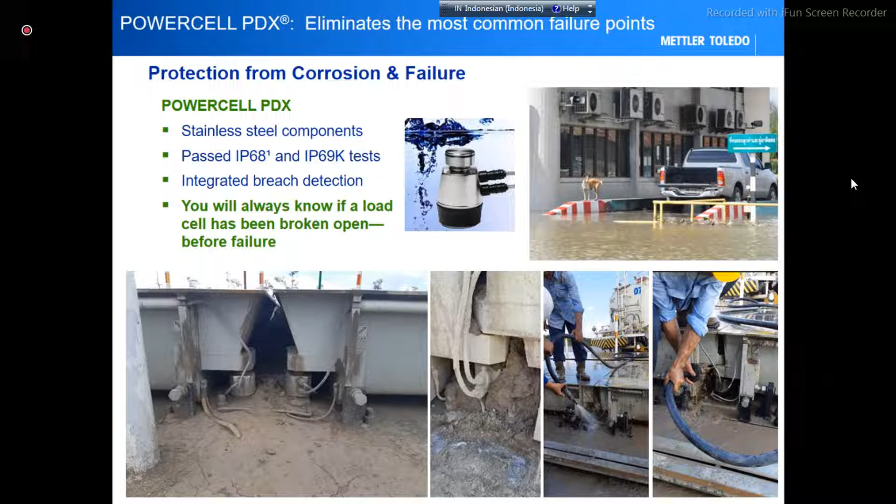So this is important because IP68 basically says I can submerge my load cell more than a week in the water. But if you don't have IP69K, you can still wash it down, but there's no guarantee that it wouldn't cause damage in the load cell enclosure, right? So that's why it's important to have the 68 and 69K in this case.

All right. Last but not least, you may ask me, hey, Jason, I would like to do a load cell replacement, right? Maybe my deck is still fine. I don't need a full truck scale. I have a load cell that maybe is analog, and I would like to convert it to your PowerCell solution. Is it possible? So the answer for that is yes, right? So you could do a conversion with your existing truck scale. You don't have to buy a new one.

And what I'm going to show you here is a video that one of our colleagues in Thailand has done. And it will walk you through how we track for notification if somebody disconnects the load cell, and how you install it and how long it takes, right? So let me share with you the video here and give you an understanding.

So if you look here, this is actually a video taken from our colleague. And if you see the timer up here, this is basically how long it will take for us to exchange a load cell out in the event of a failure, right? So what we have to do is just plug out the cable, raise the deck, remove the receiver, remove the load cell, and then take a new one in, put the load cell in, include the receiver, and plug the cable back in, right?

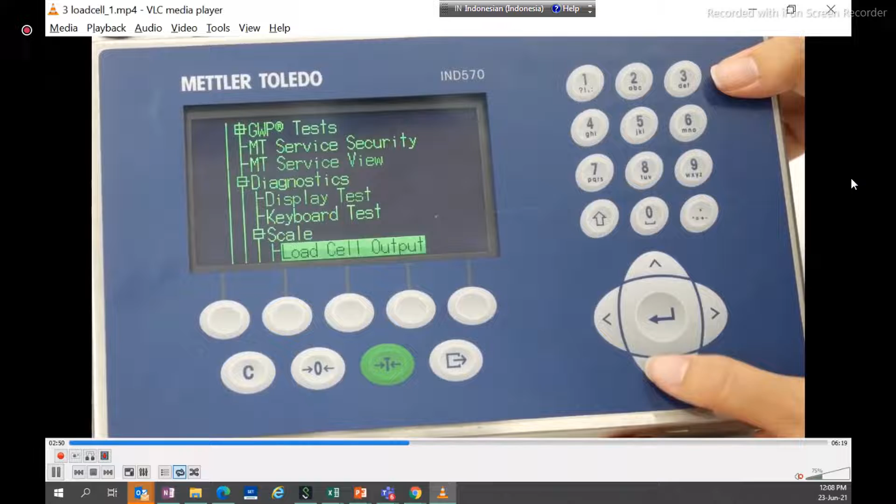Now, to confirm, what you could do is go into the terminal. You could then look at the load cell output and see whether it is giving you any weight. So as you can see here, load cell number 1, we have a certain output. That means that it's connected. Number 2 is also fine. Number 3 is also fine. But if you look at number 4, we are not getting any signal from there, right?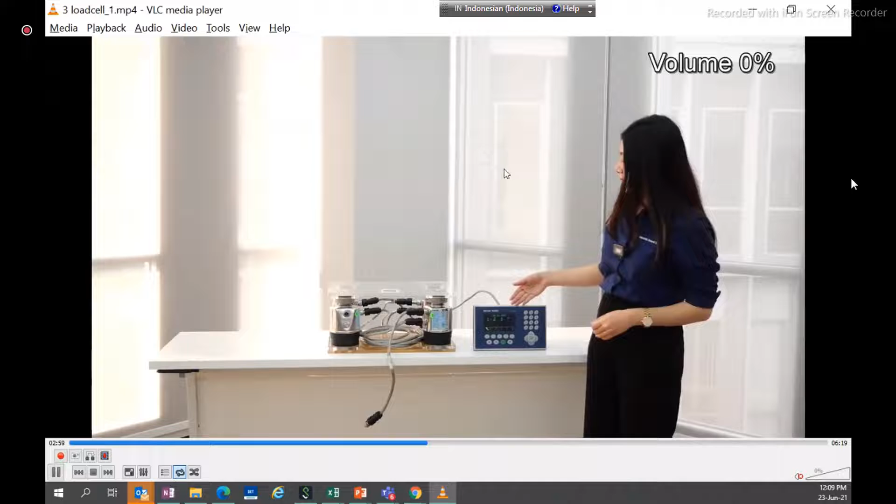So now you can basically reduce the need to investigate which load cell is down, unlike the analog or digital load cell, and you can quickly go and tend to the problem immediately. Okay, so that is how we basically notify our customers whenever a cable has been disconnected, and you can double check it with the output here.

Okay, so when it comes to replacing a new load cell, let's just say a load cell breaks down. How do you replace it, right? So I will take out the load cell. I would then have a service guy bring you a new one. What we would then need to do is to address this load cell, right? Because it's new, it does not know how to connect all together. So what we're doing now is we are addressing it.

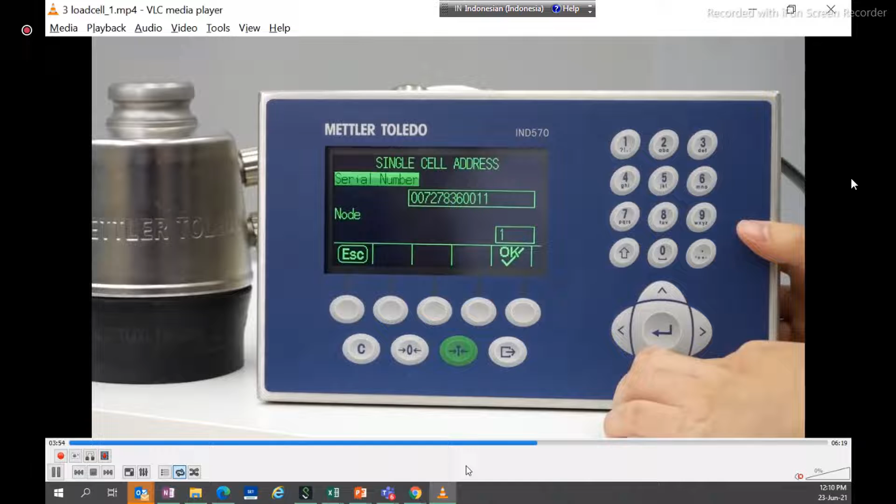So first, we go into the setup. We go to a single cell addressing, and then we connect to the load cell. It would basically try and identify these load cells, and then it will give you a serial number. And remember, just now, node 4 was down, right? So now we change this to node 4 to give it a name, basically, and we address the cell.

Okay? Now, once the address has been completed, you can then remove this and basically take it to your weighbridge, and then the service guy would basically install it at the deck itself, right? So in this case, let me just fast forward here. In this case, I'll just install it, fix the receiver back in place, install the cable, lock it, right? And then you are good to go.

Yeah. So as you can see here, what she's going to show you here is basically the weight reading will come back on. It's a little bit hard to see, but if she goes back to the main screen, you can see that the weight has now been displayed. There are no errors that come out already, and you are up and running again, right?

So with all of this, right, to replace a single load cell when it comes to increasing your uptime, it's very quick, right? Less than a minute to remove it, and then you just have to address it on site, install it, and you're ready to go again, right? As compared to spending maybe a full day trying to do this. Okay, so hopefully that gives you a better picture on the load cell replacements when it comes to after sales service or even installing it, right?

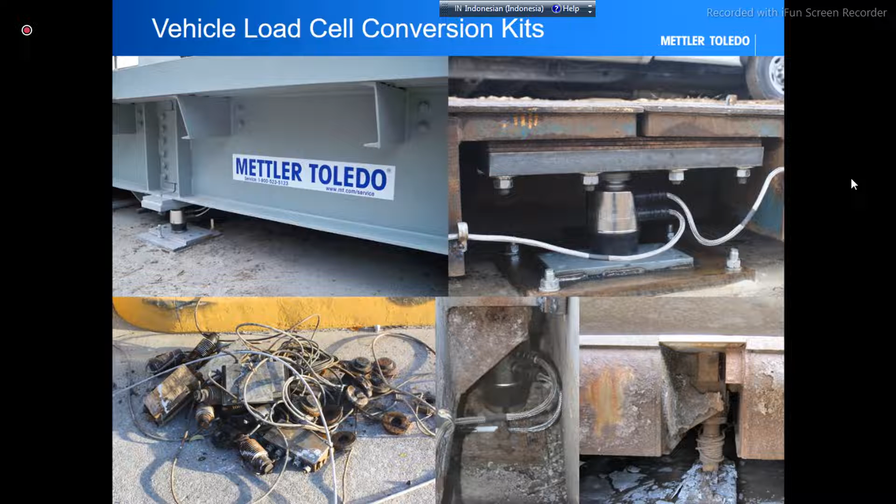So here I would like to end a little bit on our power cell load cell here with this picture, where we could easily do conversions on your existing deck, as you can see here. For our PowerCell PDX, for any of your installations, regardless of whatever brand it is. Okay. All right. So before I move on to the last session here, I would like to give you a specification comparison between our load cell and other brands as well.

As you can see here, one of the main brands that we are up against is Avery Weigh-Tronix. You can see that when it comes to approvals, digital signal processing and all of that, we have the upper hand, right? We have approvals for Handbook 44. We have better digital signal processing as compared to Avery, where they only do linearity, but as I showed you earlier, we also do temperature, creep, and all of that. Our communication is based on CAN bus in the daisy chain, but Avery is using RS485, which can be tampered with as well, because it's quite a general protocol.

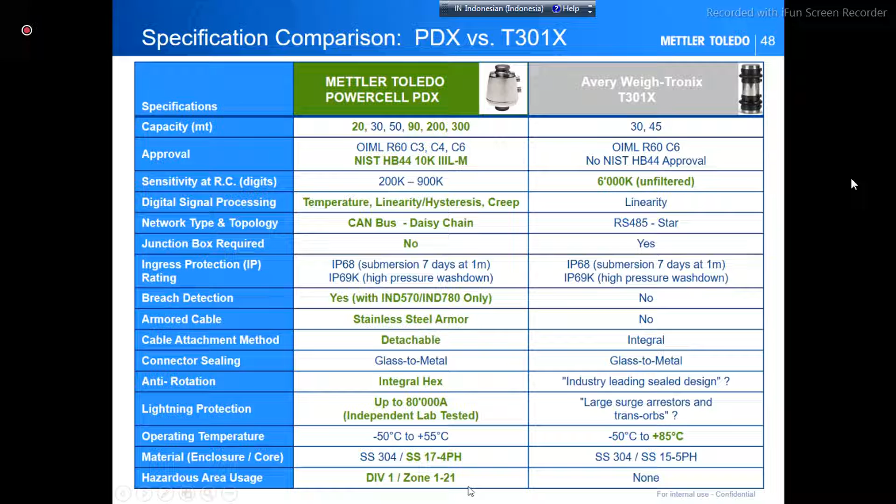We don't need any junction box, which is one of the main reasons, but Avery does. And we also have breach detection. In the event somebody were to break open the load cell, we can notify you. We also have a stainless steel armored cable to protect from mice biting it off. Our cable is detachable, as you saw earlier, so from a servicing and installation standpoint, it's much easier. We have lightning protection, but Avery Weigh-Tronix needs some sort of large surge arresters. And what's more important is our solution with PDX can supply for a zone 1 application as well, if you have any at this moment.

Gary and Naomi will send this to you, and Teras will also forward this to you so you can have a closer look. But I just wanted to give you some sort of spec comparison between ours and other competitors out there.

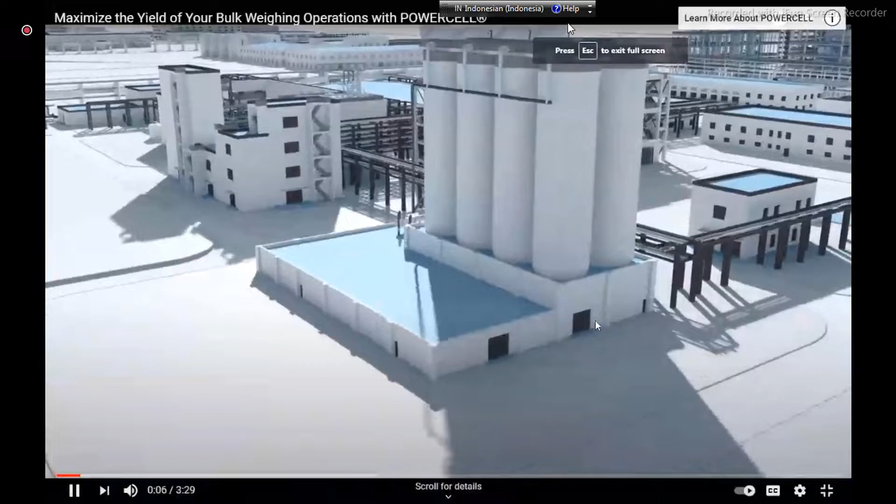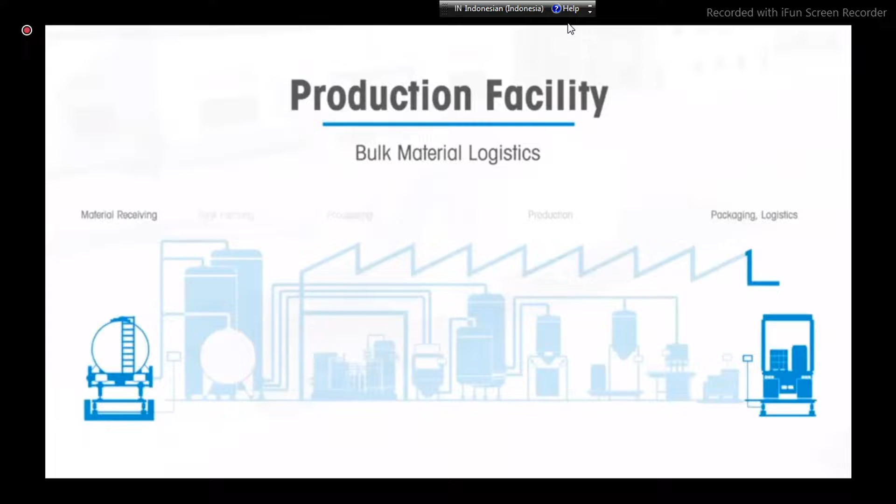METTLER Toledo Power Cell technology is designed to improve the performance of bulk weighing applications across the entire production process. Let's take a look at how Power Cell technology can help you to cut maintenance costs by up to 50%, reduce downtime, eliminate human errors, and avoid bad batches and rework. Traditionally located outside, truck scales are exposed to harsher conditions than most industrial equipment. METTLER Toledo's Power Cell PDX load cells are built for the challenge, offering improved reliability, decreased maintenance costs, and industry-leading accuracy. Power Cell PDX systems are daisy-chained together, eliminating the need for a junction box, the #1 cause of truck scale failure.

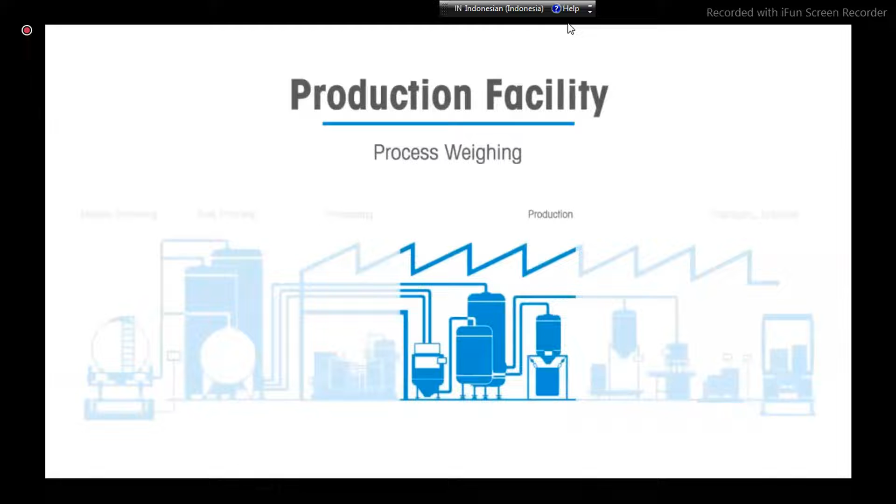Features including a stainless steel hermetically sealed enclosure and advanced lightning protection defend Power Cell PDX against the harshest weather conditions, including complete flooding of the scale. In the event of a failure, the detachable cable design allows for quick and easy replacement of a single load cell. As products are received into the plant, we will highlight how Power Cell technology can improve the production process. Power Mount weigh modules offer a level of visibility into your tank scale system that no analog solution has ever been able to provide. The condition monitoring features of Power Mount constantly communicate with each individual load cell and alert users of typical errors prior to any serious problems occurring. This helps to reduce failures that can result in poor product quality, costly thrown away batches, and product recalls.

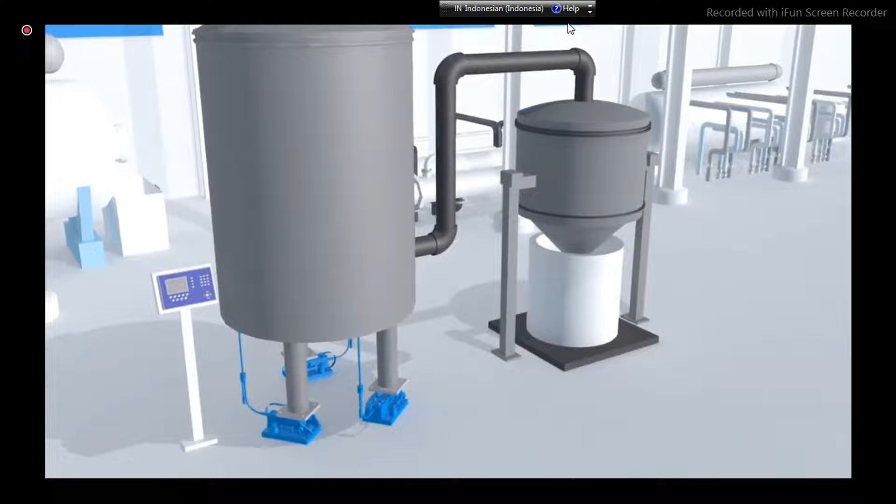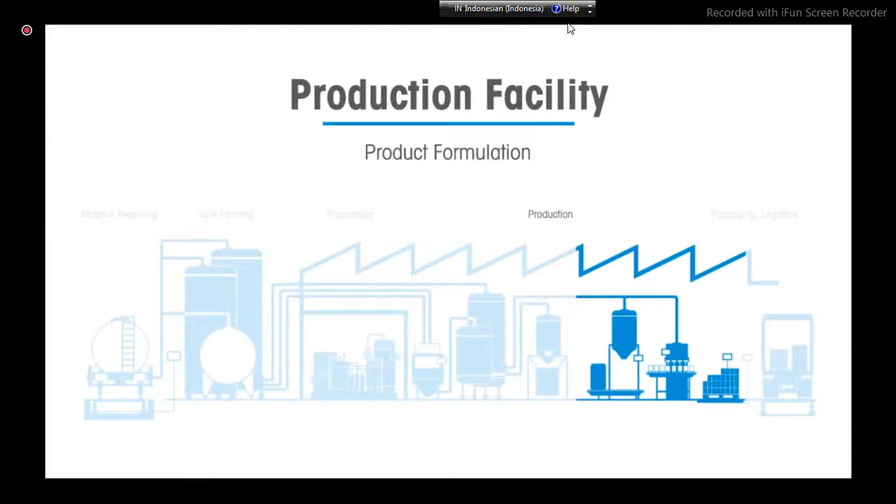Although it is not common, in the event of a complete load cell failure, the Run Flat feature in Power Mount will automatically activate, keeping your system running until your batching process is complete, saving your operation significant time and money. Moving to the final stage, we look at floor scales, which are an integral part of the bulk production process. New Power Deck floor scales are the first of their kind, utilizing Power Cell technology, and are designed to save you time and money. With real-time alerts, including load cell failure, debris detection, and overloading, you are able to avoid bad batches and rework. Incorrect loading is a common problem for traditional floor scales due to the lack of visibility around the scale and no alerts in place, leading to inaccurate measurements.

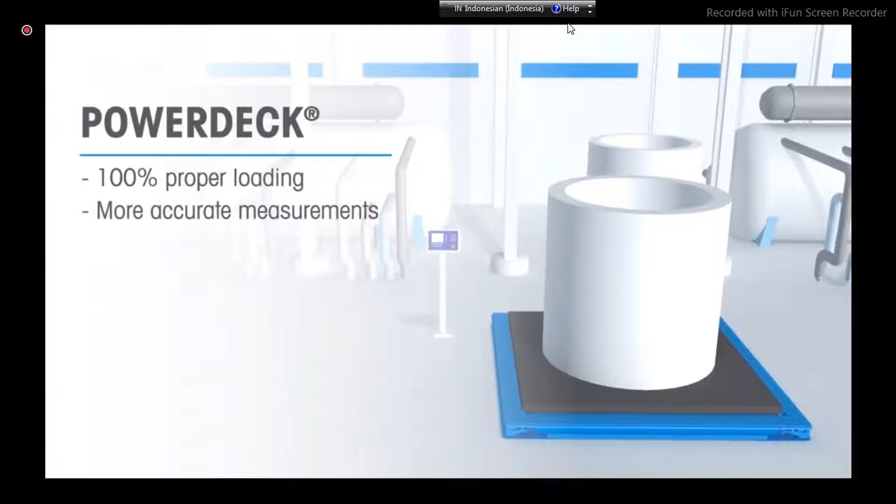Power Deck is able to solve this problem with real-time operator guidance. Users are alerted when a load is improperly placed and guided to where the load should be located on the scale deck, ensuring proper placement and accurate weighments every time. Whether upgrading current equipment or designing a new facility, Power Cell technology will help you achieve maximized yields through improved reliability, increased accuracy, and simplified maintenance. Choose Power Cell technology to enhance business operations today.

All right. So, with that, I've come to the end of my presentation. Hopefully, this session has been helpful for you to understand how you can calculate your profit loss, what the effects of inaccuracy on your plant are, and the solution of PowerCell that we have here that can help you to reduce service costs over a lifetime. Also, in terms of ROI, how much can you benefit out of this? And also when it comes to fraud prevention and stuff like that, how can we help to mitigate that and also to reduce some of the external factors with active compensation?